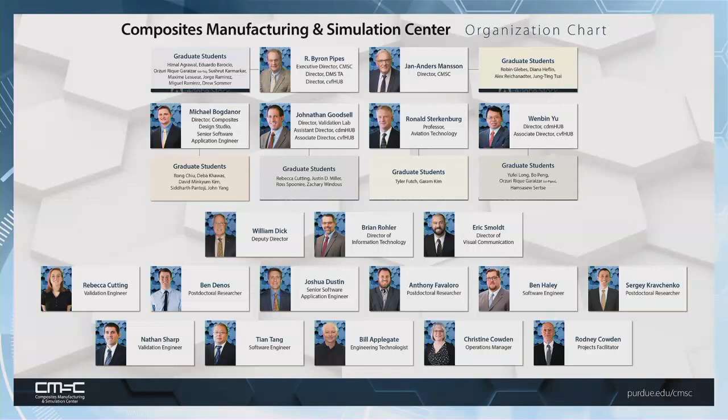Yeah. So we've attracted Jan-Anders Månson from EPFL in Switzerland to come and be my partner. I'm the executive director, he's the director, and then we each have grad students. There are faculty under us. Not under us, they don't work for us per se, because we're not department heads, but they work with us, with the more senior faculty, and then a group of professional staff, some of whom are engineers, some of whom, for example, this is a visual communications person, so you can see why the quality of my graphs are pretty good. We actually have a first-rate person that does that.

We live in something called the Indiana Manufacturing Institute. This building was built for us in our research park, and it is not a university building. So I live off campus, and that has some interesting possibilities, the most important of which is there is parking wherever we need it, right next to the building.

So let's talk a little bit about simulation. What's happened in my lifetime in my field, in this field of composites, which I would like to say spans 50 years. It really started before 1968, but it began to pick up energy and momentum, if you will, in 1968. And I entered the picture actually in 1969. So next year is my 50th anniversary of working in my field. And so 150th of Purdue University and 50th in my work.

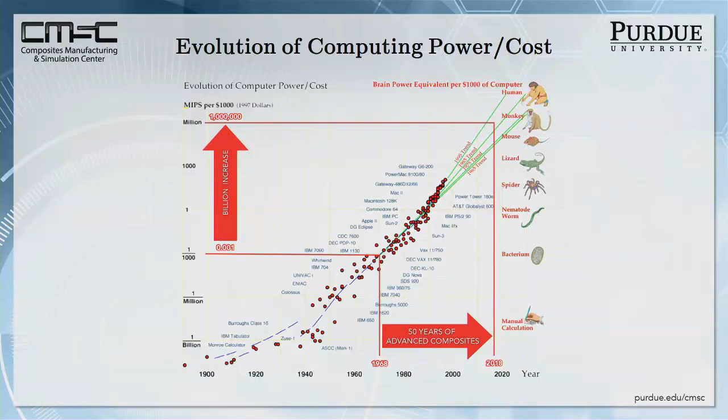Question is, what happened during that time since I've been working in composites? Answer, a billion increase in computational power. A billion. Well, that's something you can work with. If something increases in power by a billion times, it means things have really changed, and that is really true. Simulation is now here, it's active, it's possible. I'm going to show you some things that were impossible when I started this work almost 50 years ago, and that we've done now. But put this in perspective.

What am I talking about? What am I interested in, in composites? And the answer is carbon fibers. These things are about 5 microns in diameter. They're stronger than any known man-made material, and they're quite light because they're entirely carbon. They have densities about 1.8 grams per cubic centimeter. You can put that in perspective. It's quite a bit lighter than steel, and compared to the human hair, they're quite fine.

Meaning, so do you think you could make an airplane out of this? Was the question in 1960 or thereabout when these were invented. Now, carbon fiber had been around for a long time, but it was invented in 1960, the one we work with today, polyacrylonitrile-based carbon fiber. Why? Because it's so strong. Nothing had this strength before. And it was invented here in the UK and in Japan, same time, 1960.

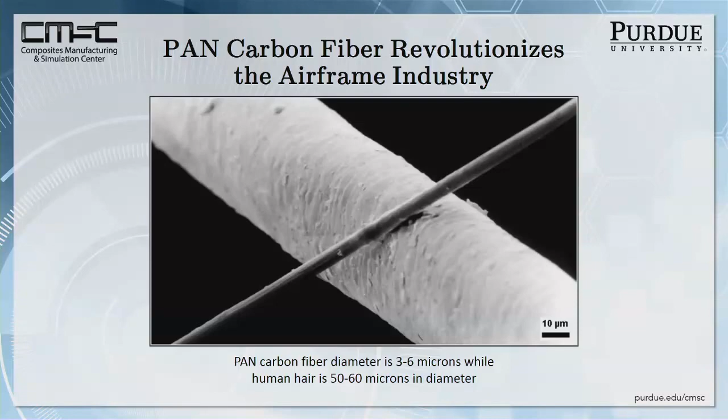Same fiber, interestingly enough. So why are we interested in these materials? Pretty simple. When you plot specific modulus versus specific strength, they sit right out here on the top of the curve. They give you better performance on almost anything you can get in a strength to weight ratio. And here's the typical spool of the material.

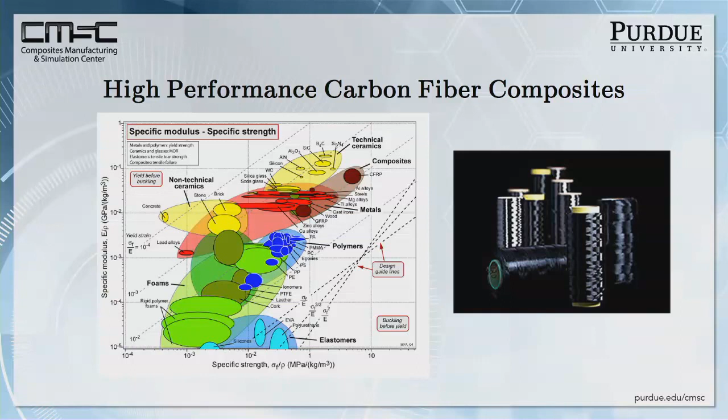Now, there's only one small problem. I got to figure out how to make an airplane out of something that's a thread. Well, man had this problem early on and learned how to make textiles from wool and cotton. It's the same problem. Well, not quite, is it? Almost. So we certainly use some of the same techniques, textile techniques, but we did learn how to do it. I mean, these are the things that have happened just since I've been watching.

These are all carbon fiber based airplanes. They're all military. Here's one that you can't see with radar. This one you can't see with radar. I think the F-35, that must be it there. It's either the F-35 or F-22. You can't see it and it goes quite fast. And so these were defense advances first, and this came out of the defense industry. It did not come out of the civilian sector in our country.

And by the way, that's true in America. Much of our basic research is funded by defense. People like to think that that's not the case, but it is the case. Their budget in research is 2 or 3 times, maybe 10 times that of any of the others, except NIH is catching them, I think.

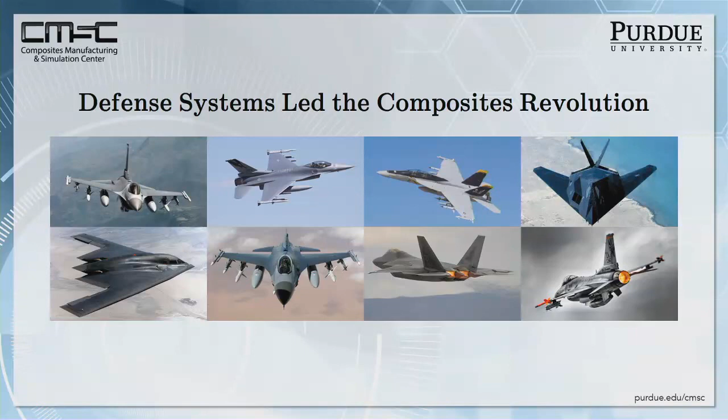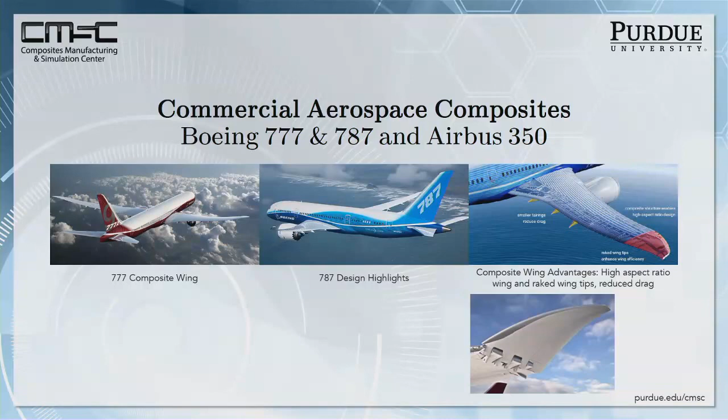Now, what's happened recently is we have a new wing program for the 777. It's called the 777X. The 787, that's all carbon fiber airplane, fuselage, wings, tail, everything. And on the new 777X, we're going to have a wing which tilts up so that it can come into the airports and not get in the way of other airplanes. The wing is so long.

This field, after defense, actually the first area was leisure products. And this is just one manifestation of that, but you all have seen golf shafts and tennis rackets and pole vault poles and all kinds of things that have been generated. I'll say more about that in a moment. And then now we're working in cars.

And the institute that I lead at Purdue is aimed at making lightweight cars from these same materials. And of course, the Germans did it first with the i3, that is to say in a large production car. And look at the weight that you can save. I mean, 2 normal individuals can carry the body of a car. That's not true in today's steel-based systems. Got some work to go for sure, but we're getting there.

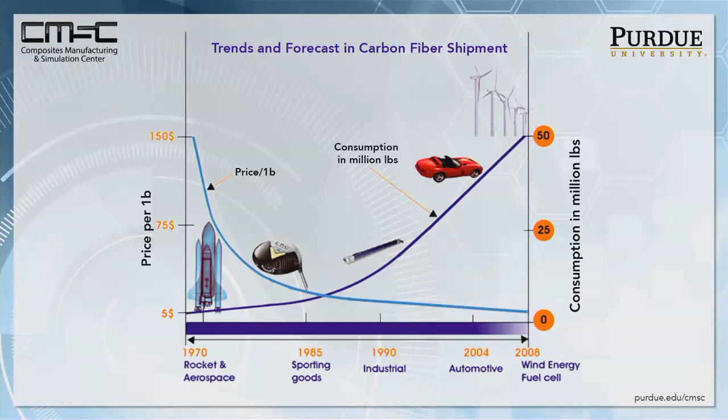So if you look at this, what's happened, and this is a kind of out-of-date thing, but it gets us to 2008, where about 50 million pounds of carbon fiber were consumed. Actually, this past year was 100 million pounds. So that growth is continuing. I think we will see 1 billion pounds of carbon fiber produced soon. By the way, you see the cost-volume ratio, the same trends on all materials.

Now here's the interesting thing. If you're in aerospace and you look at how long it takes to develop a product, about 10 years to get a material into an airplane, and then you have almost another 20 years of use. So you've got some long-term issues. You can afford to invest lots of money. You got a lot of time to get the money back.

Then if you go down to this lower-end consumer electronics, you're talking about sometimes less than a year, sometimes months. Product is developed, delivered, sold, and all the money has to be recouped in that short time. So as you think about manufacturing and investments you can make, these are important consequences. We need to move aerospace from up here down to this level where we have in automobiles today, or even what we're seeing in sports, rapid turnaround of new ideas and new products that could be evaluated for all kinds of applications.

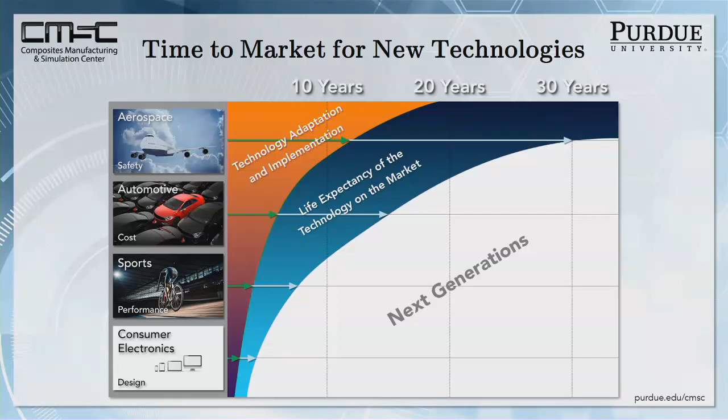So recently I met with Greg Hyslop, who's the new CTO of Boeing, and you can read all the things that he said that I stole from the newspaper, but at the very bottom he says, Byron, I'm really afraid we're going to be a company that is put out of business because somebody else figures out how to do this faster than we're doing it. So rate of manufacture of this process in composites.

And you look at that and you say, well, if you're going to change the rate of manufacture, it isn't about moving people faster or moving products down the production line faster. It's about dealing with the manufacturing process itself, and I'll say more about that in a moment. But to put in perspective what that means, if I'm going to speed this process up, I have to speed up every one of these people that are in the supply chain.

That's a daunting challenge. What's the one technology that I might be able to lean on to give me some help? Simulation. I'll come back to that in a moment as well. So, right now, in fact, I think the opportunity is that if we make simulation the language of innovation in manufacturing, then we can tie that supply chain together with the same language. It's the same as a language that we communicate in. We all know that we communicate in software languages like Fortran and others. Today, the language of manufacturing will be simulation of the phenomena, of the physical and chemical phenomena in place.

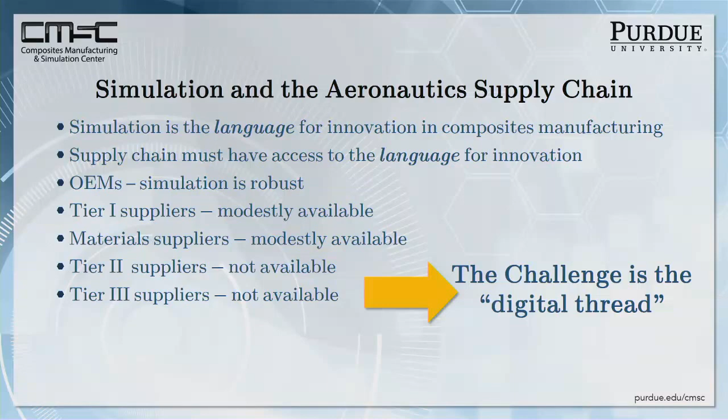Right now, the OEMs, Boeing and Airbus, they all have these big tools. They all have these big computer programs. They all have these big computers. But if you go down that supply chain, you don't have to go very far at all before you realize they just don't have it. It isn't like they have lesser quality. They don't have any. And so you've got the supply chain now supplying a company that they don't have the language to speak in. So that's got to change. And furthermore, the so-called digital thread of the future, where we design a part and we track that part digitally through its entire life. How can you do that if the supply chain doesn't have the language? So that's the theme of this work.

And as I see it in the future, we have to have manufacturing-informed performance, meaning simulation teaches us how the part or system will manufacture before we make it. Because right now, the process is design it perfect, make it imperfect, now try to figure out why it doesn't perform the way we designed it because of all the imperfections we put in manufacture. That's the current process. In fact, fracture mechanics came out of that whole idea. There's a defect in there. If we can find it, we can calculate its performance. Why do we have to have designed-in defects? We have to take that knowledge and understand the behavior, then we don't have to have defects. So this digital twin in manufacturing becomes a real issue, a real opportunity for your generation, frankly, students.

This is what's coming. And we have created something called the Composites Virtual Factory Hub. I'll talk about that, and that's more about delivery of the software. And then I want to work through two examples of what we call workflow apps. Where did that come from? Well, I began to think about this and work with software companies, and what I realized was that what the engineer needs is something like a phone app, meaning that the simulation solution they're offered takes you where you want to go, not gives you something that looks like the front end of a jet aircraft where it's got thousands of buttons, you don't know which ones to touch. And that's the way current software is written, including Dassault Systèmes, my primary sponsor. They have something currently called the 3DEXPERIENCE, which has got enormous capability. But it takes 3 guides to get you through the first steps to find out where anything is.

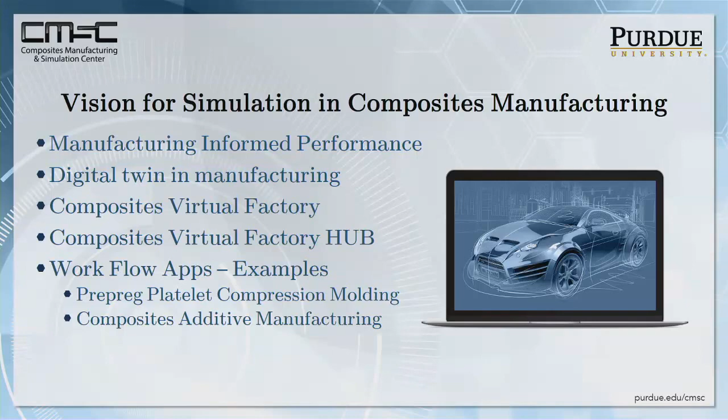Okay, so the Composites Virtual Factory Hub, what is it? It's a delivery system. It takes commercial codes and it creates on the other side of them workflow apps: additive manufacturing, injection overmolding, high pressure RTM, compression molding. These are 4 of the methodologies we're developing. And to say that these guys are happy about that is kind of a mixed bag. It's so interesting to talk to them because they all want to have this, they want to own it all. But none of them have the full capability.

There will come a day, I suspect, I don't know how soon, maybe never, that Dassault Systèmes will have all these pieces, will own them, in which case they will have this capacity, but they don't have it today. And so they keep acquiring things. They've recently acquired a molecular modeling code. They call it BIOVIA, and so on. I won't spend more time on that.

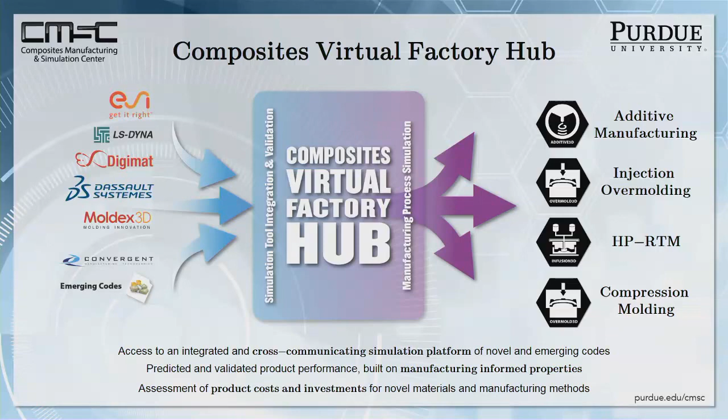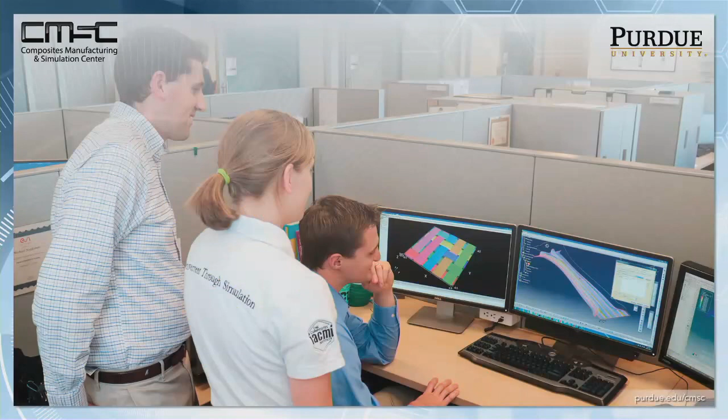Here's just some of the things we intend to do. Additive, prepreg, 3D preforms, autoclave, cost modeling, crash, overmolding, infusion molding. These are, I think, 8 of 12 that we're thinking about doing that we've started working on. Put that in perspective. But in the end, simulation codes don't go anywhere without people like this.

These are 3 of my engineers. Rebecca Cutting is in crash. Nate Sharp is cure kinetics. Mike Bogdanor runs the design studio. We have a design studio where a person can come in and say, I want this part designed. This group can design it. They all work for Mike. These are all PhD, but she's close to PhD, not finished yet.

And in that platform, what we're planning to have is a secure platform with cloud computing services, and we use Amazon Web Services for that purpose today. But we've built the hub based on a platform that was developed at Purdue called the HUBzero platform. It was a National Science Foundation developed system.

And here are the 4 apps that I was talking about. Additive manufacturing, which has as its base CATIA, Simplify3D, e-Xstream, some of you know about these codes, and Abaqus. Both of these are Dassault Systèmes. And then injection overmolding, different companies and their codes, and so on.

I showed this talk at the Dassault Systèmes major customer conference last week. And I'm still getting comments about the fact that I have Dassault Systèmes codes mixed in with others. How dare I have them touch one another? But the CEO and the Chief Technology Officer all agree that this is the present, if not the future.

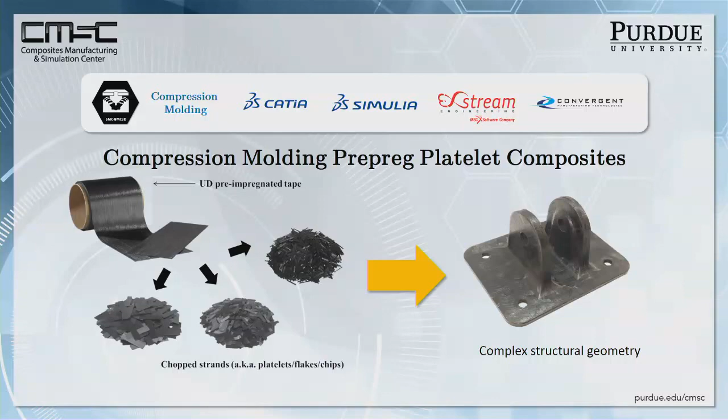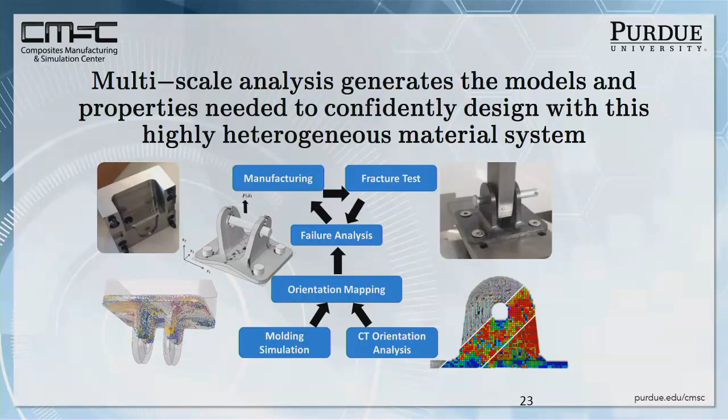Okay, so if you need to do that, this just shows you the different steps we need to go through. We need to understand the failure of it. We need to understand how the fibers orient during the molding process. We need to put all of that together in failure analysis and do tests and so on. This is the mold. Here's the part. You're going to hear more about the mold in a moment because we're going to 3D print the mold. That's the second app. So the first thing that we did was to develop this molding simulation.

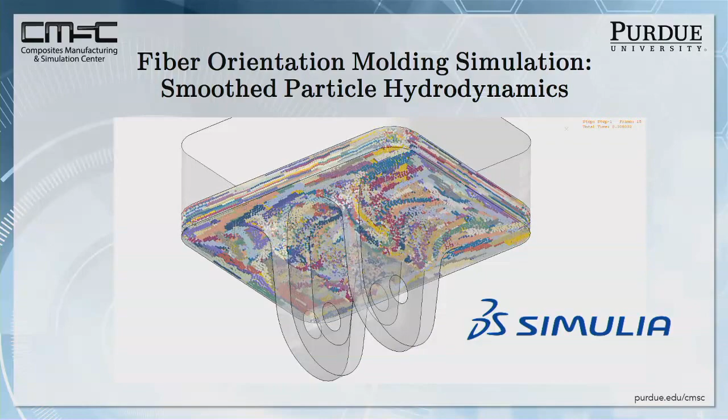First of all, you need to know that each of those colors is following the orientation state of a platelet. This is smoothed particle hydrodynamics formulation of the finite element method. It's the most advanced finite element modeling for what is actually solid mechanics. And why didn't we use fluid mechanics for this? It's an interesting question because it turns out the fluid mechanicians cannot solve this problem, in spite of the fact that they have been trying for 30 to 40 years. They can't do it. Why not?

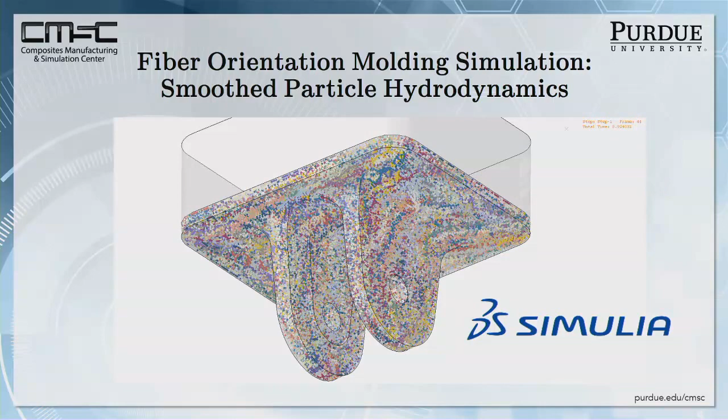Well, because they are fluid mechanicians. They think everything flows like a fluid. It doesn't flow like a fluid. It flows like a highly anisotropic solid, actually, it just moves slowly, but it flows. And you need that kind of behavior and understanding. To do that, you have to redo how you think about materials and their deformation.

It turns out these other two are pretty much the viscosity of the polymer with a small geometric change in it. But by the way, those differ by sometimes as much as a factor of a million. So that puts that in perspective.

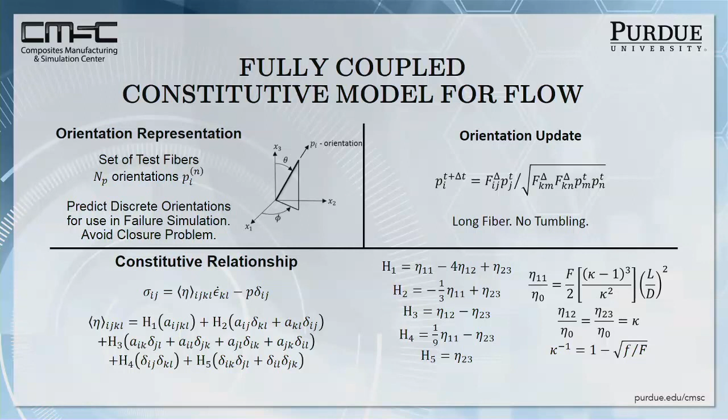Once you've got that relationship, you can build a stress-strain relationship, stress-strain rate relationship, and you can use a conventional solid mechanics finite element model. We used ABAQUS in this case, and build with this methodology. We have a couple of different approaches, the implicit and explicit approaches to flow.

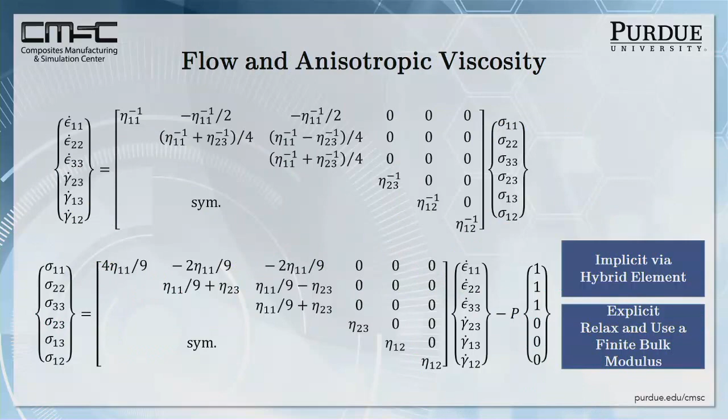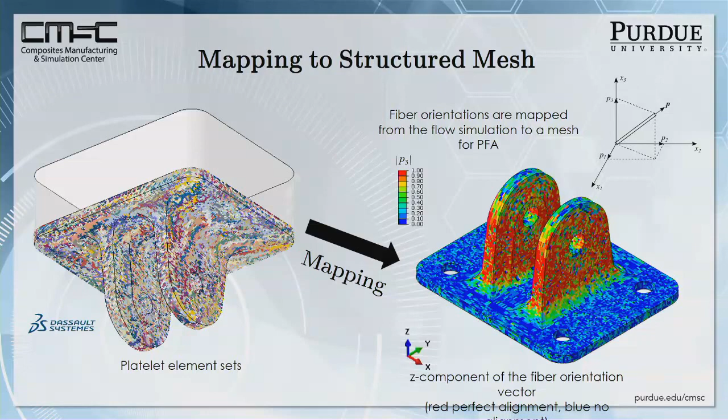And we can map all three components of the orientation tensor throughout this part from this data, which is all predicted. Whoops, sorry, I went backwards. As usual, I was trying to point. This is predicted. This is now transformed into the material coordinate system, and we carry out now a solid mechanics kind of analysis to find failure behavior.

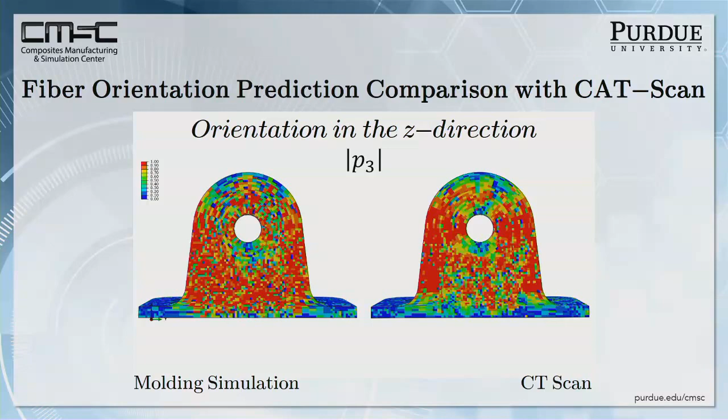Well, let's do one experiment, which is to run around the circle a little and sweep out an area and then plot the components of the orientation tensor and see how our predictions and our plots of the actual measurements look. By the way, the flow is coming from here. It separates and then reconverges, reassembles here along what is called a knit line. Notice here that the fibers are all pointed now transverse to that, parallel to that line in that system.

And so right here in that knit line area, it should show a very high value of one orientation component, and that one should be parallel to this line, which is the X2 direction, and that's the peak. And then the one normal to the direction should take the minimum, and it does. And of course the out-of-plane should be relatively small. So this shows a very good relationship between prediction and observation in a fairly, I think, aggressive way. We've done many of these plots, and we keep surprising ourselves about how good this is.

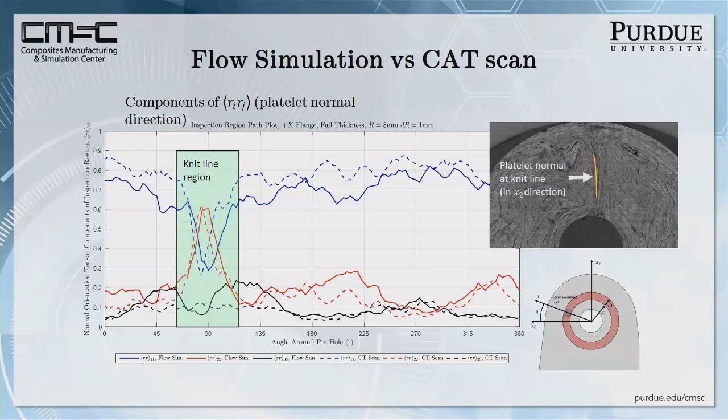All right, now once you've got that internal mesostructure, you need to be able to predict strength. So let's make some tensile bars. But we'll need a failure model. We build in the damage mechanics. This is continuum damage modeling. Does this even work for this class of materials? Very interesting question. Lots of work in this general area, and I wouldn't argue that we have absolutely the final answer here, but I think we have a good step in that direction.

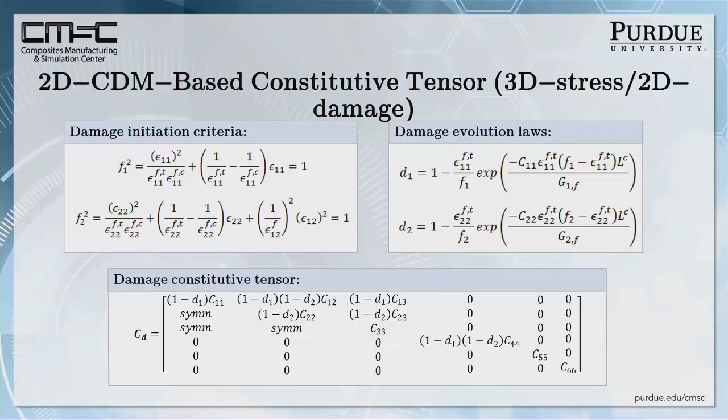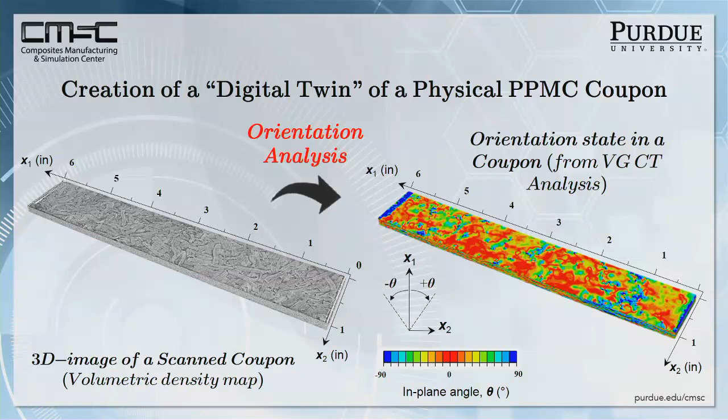You cannot assume this material is homogeneous. It isn't, even at a scale that's of interest to us. Well, all materials ain't homogeneous at some scale, but this is a mesoscale that's reasonable. That's true. So here's a typical prediction. Not that this is the best, obviously.

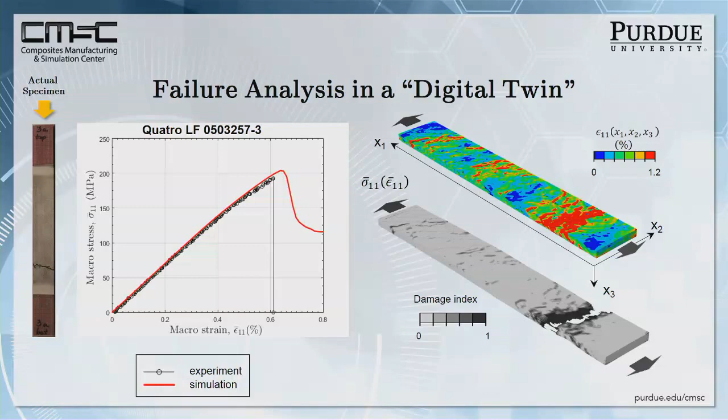Meaning damage accumulation in this class of materials is a really good way to model them. Probably nothing better. Meaning also that you cannot use a representative volume element for these structures throughout the entire part. Okay, so you can take that then and go on to the more complex.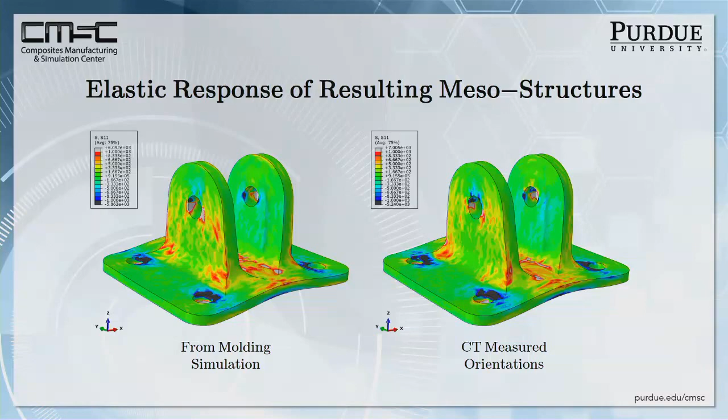This would be from the molding simulation: the deformations, the elastic deformation before failure. Failure in this gets more complex because you've got a lot of fastener pin interactions that I don't want to go into at this stage.

Okay, let's stop and talk about the next app, which is the additive manufacturing app. And I call to your attention a company by the name of Thermwood, recently created in Indiana. They actually come out of the wood cutting industry. But this is a 3D printed piece, which we have a secondary milling step, which is a kind of a routing step, and then a coating step.

And the height of this is more than 1 meter. So we're talking about printing things that are large. This is a large 3D printer. The ribbons that it's putting down are 3 centimeters probably, and maybe 5 to 10 millimeters thick, in that range.

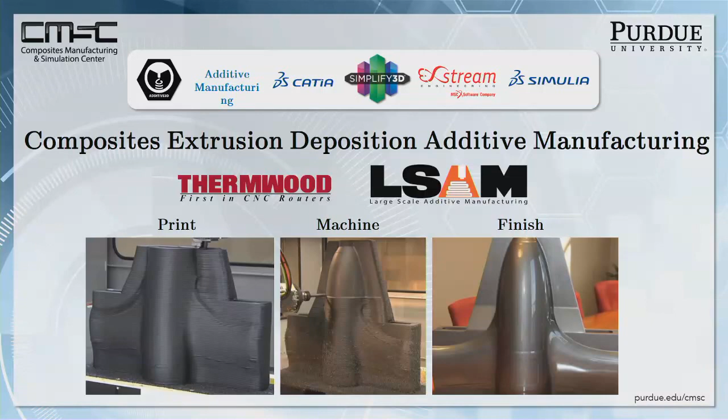So why are we interested in this subject? Well, we want to print a tool to make this part. This is the part we made and just analyzed. This is the tool. Now this is Eduardo's work. This is a metal tool, actually, that we made this part in. So there's the part. But you can see that, no, this isn't the metal tool, Eduardo. This is the composite tool, isn't it?

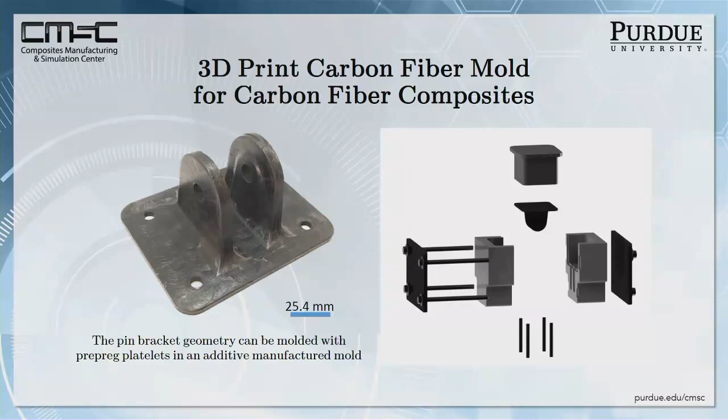Anyway, it's in 2 halves. We put the little pieces of the platelet in there and then push it down, heat it up, push it down, melt it, and make this part with it. All right. So in 3D printing, the first thing you choose is the shape of the part. This is half of the mold that made that part. And can you print it anywhere close to this geometry?

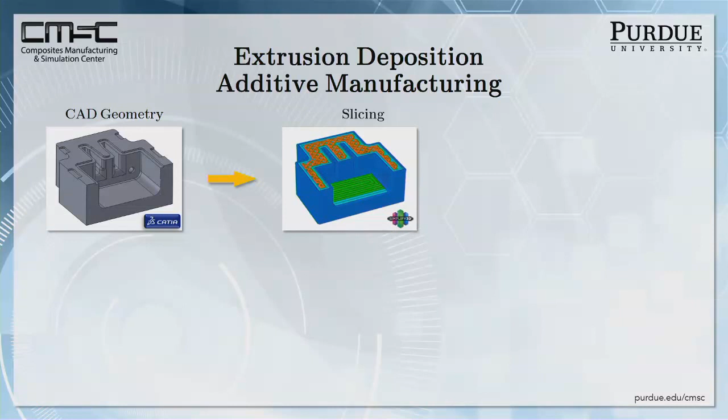Well, first you've got to decide the geometry you want, put it in CATIA. Then you slice it, because 3D printing requires a slicing operation, if you will. Where do you put the layers? What orientation should they be? And here's our printing system in process. You can see the correspondence between this and this. They look a lot alike.

A finished part that's not quite perfect, so we have to go to a machining step, but it's really a surface finishing. And here's the finished part, which looks an awful lot like the original CAD geometries. That's the process that we go through. Now, can you model all those steps in such a way that you could design this part? Because interestingly enough, this shape and this shape are not the same.

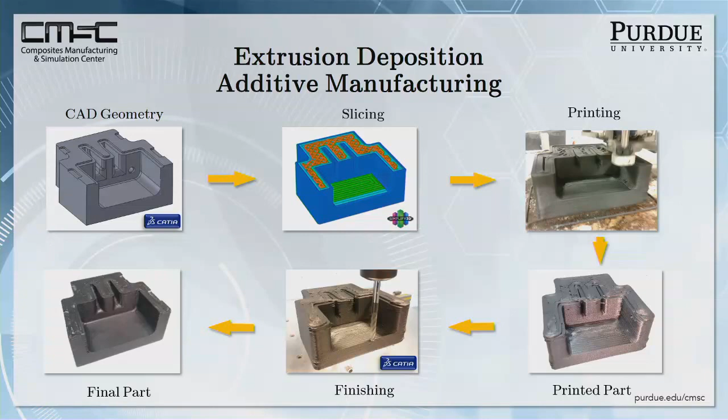Wait a minute, you said you made it the same shape, you put it all in there. Well, it changed shape with residual stresses as it cooled to room temperature. And by the way, each layer was cooling at a different time. So you've got all of it, and you've got some creep characteristics going on. So can you capture all that? And by the way, could you go back here and change this geometry such that this geometry would be the right one?

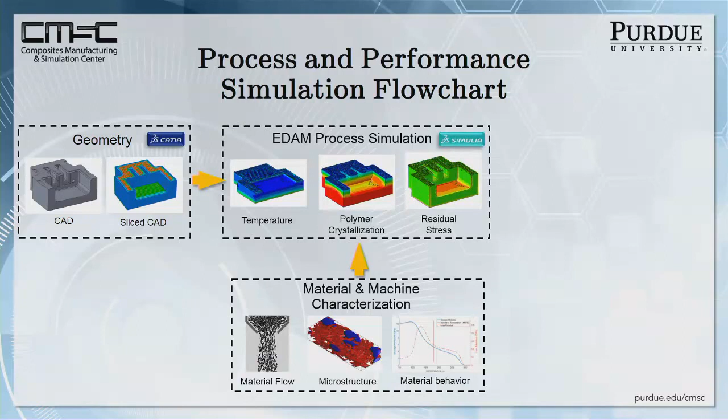Okay, so here's the flow chart. We do our CAD with the slicing. We do a bunch of material characterization: flow, microstructure, material behavior, polymer characteristics. We then understand heat flow, polymer crystallization, and residual stresses that are developing. And then we look at creep and shape change with that.

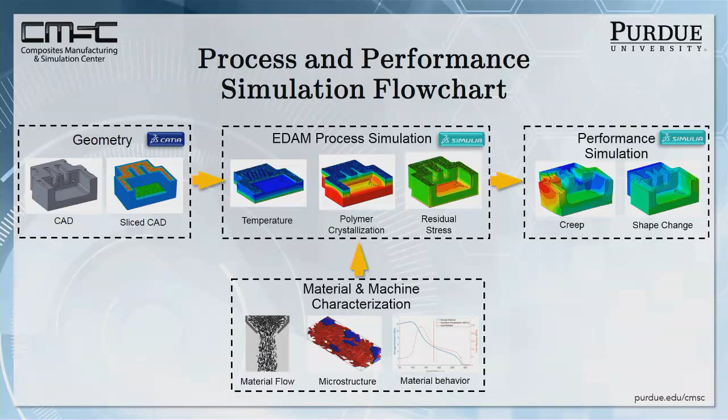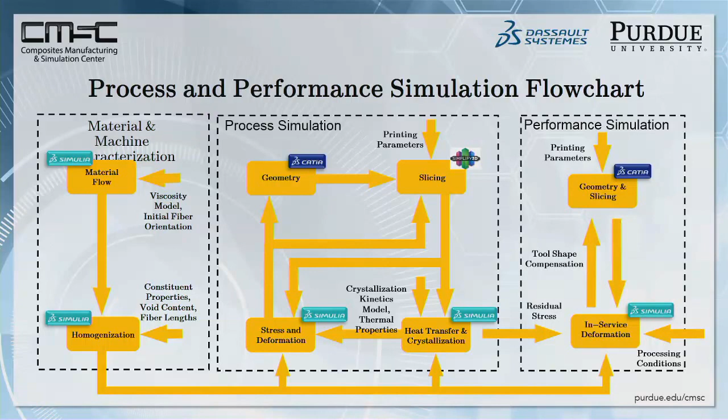And if you hook all those things together, in simulation you can do the same thing: material flow and homogenization of properties. Now you hook that to process simulation, which has geometry in it, slicing, heat transfer and crystallization, crystallization kinetics, stress, strength, and deformation. And then we have a performance simulation with the real microstructure that we put in there by design. And if we like what we get, we keep it. If we don't, we can reverse the process and change it.

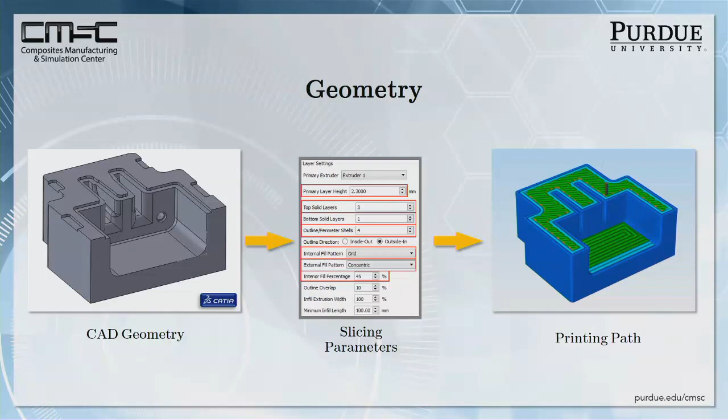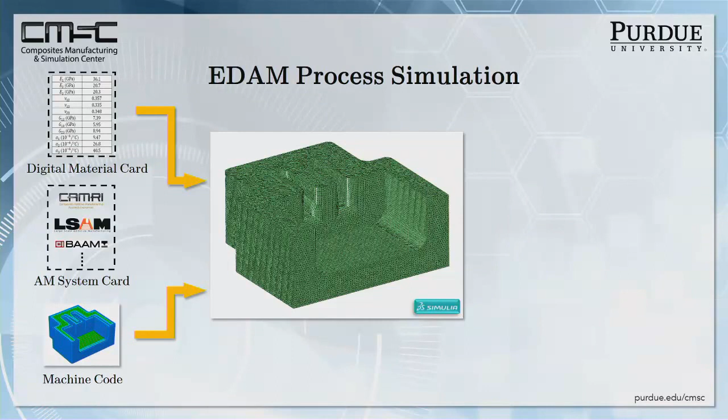Here's a typical printing path being developed that you can see a simulation of. And notice we don't make it solid. We have infill so that we can save material. And so that's in itself an engineering design problem. So there's the printed path. Here's the finite element simulation for the process, and the other side of which is we predict crystallization kinetics and residual stresses in the system, and out of that creep, obviously.

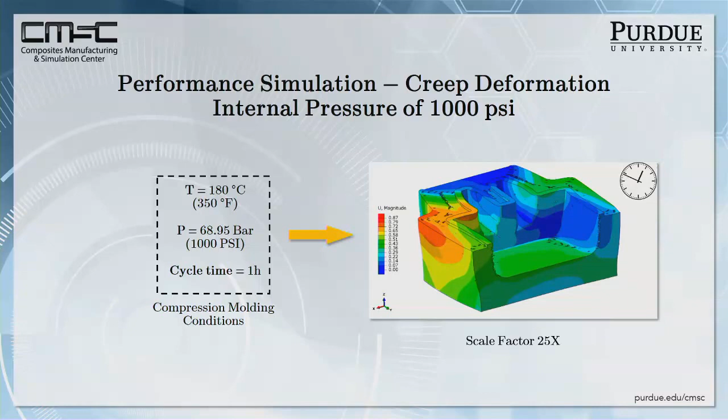In fact, here's creep. So here's the part deforming under temperature and putting in 1,000 psi internal pressure, as if you were molding something. The part itself creeps during that, and we want to find out how much and what is the deformed shape. Again, we want the proper shape of the molded part, not the mold. So the guided mold design: if you have all those pieces, you can iterate them in such a way that we produce the proper geometry initially. That's the whole point of that app.

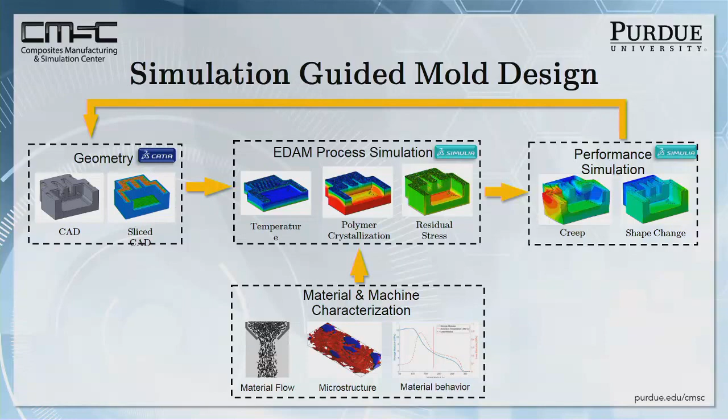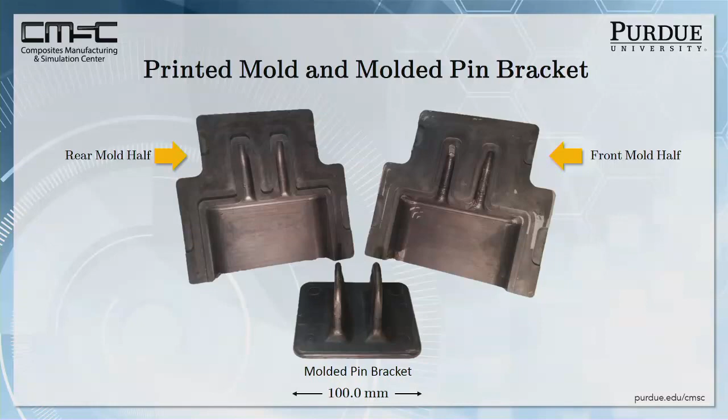Okay, so there's the molded part, and there's the tool. This part was molded from a thermoset polymer. This is polyphenylene sulfide and 50% carbon fiber. This is epoxy with 60% carbon fiber. And this is made from platelets in this mold.

So I've shown you two integrated workflow apps. I want to change slightly your attention now to talk about what's coming. What do we need to do if we're going to deliver this kind of working structure for the engineering profession?

And I turn to the NASA Vision 2040. It wasn't that long ago we were thinking of 2020, but now we're not thinking about 2020 anymore. We're thinking about 2040 as near term, right? That's what's coming. So NASA has a very nice report, you might like to read it, that talks about multi-scale modeling and simulation, written as recently as 2018, and it has some elements in it that I think are worth repeating. First, what is this vision for this world that you're going to live in, you engineers that are coming along? It's a cyber, physical, social ecosystem.

I like that point of view, because it is an ecosystem. This is all about products, developing products. It's all about, can you afford them? Can you empower the society with these things? But we need to accelerate this with concurrent design, development, deployment of materials and systems throughout the product life cycle of an affordable, producible aerospace application. Well, that's NASA, but I mean the car industry sees it the same way. So does everyone else. So what is their end state of this ecosystem?

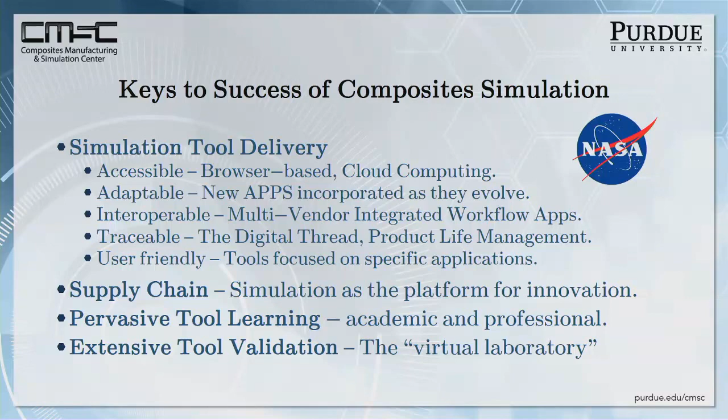I think we in academia have this tough problem that we don't teach the content as much as we did before. We now have to teach understanding. Harder to do, I might add. And I think there's things coming like this pervasive tool learning and the virtual laboratory that will help with that. But there are some challenges. Number one, the tools keep changing. That fights against standardization. Number two, a lot of this happens with small businesses. How does this all work economically? And this agility of receiving these new acquisitions, these new vehicles. I mean, suppose a guy has a great idea and starts building a code. How does a big company absorb that? How does it work? Don't know the answers to that fully.

This digital thread, I think, is challenged by the fact that these different codes don't speak to one another today. How in the world can you hand off? It's almost like handing off evidence in a legal case. How do you hand off from one place to another and assure that it was handed properly and didn't change in the process of being handed off? And so this digital thread, I think, is going to be called the digital pipeline, but we have to have fidelity. We have to capture all of manufacturing. We have to do the variability in meso microstructure, and additive manufacturing can put great demands on that, in my opinion, what's coming.

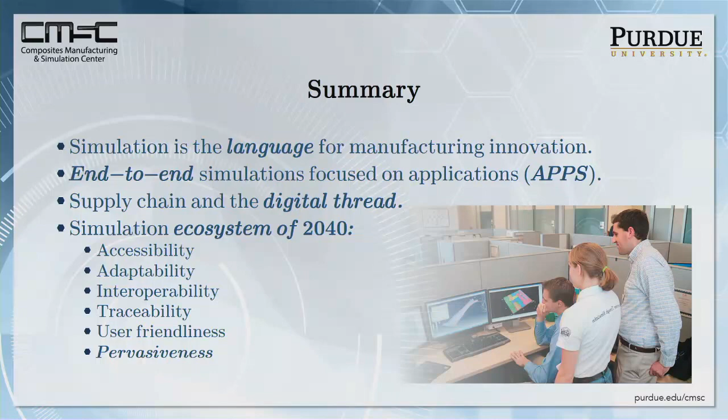So my summary is, I leave you with this thought. Simulation is the language of manufacturing innovation. This ecosystem of 2040 involves the digital thread, these end-to-end simulations and apps, and here are all the things we need. The last one I would add is it's going to be pervasive. And pervasiveness is coming so that it is everywhere, and we have to deal with it in a very effective way.